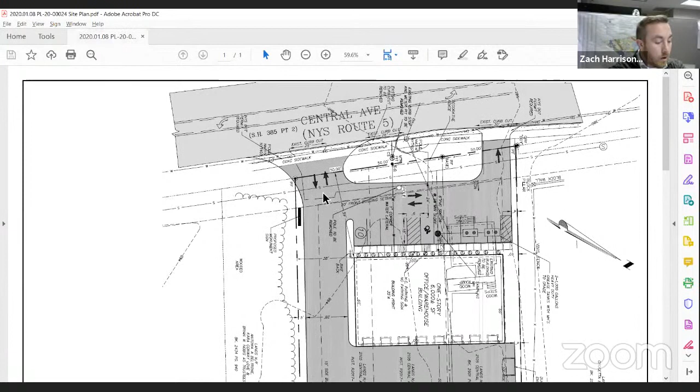Just to start it off, the project went to DCC back in December, and all town departments and the TD were present. Just real quick, because it's 3 properties, what will need to be done is a lot merger to create one parcel. So that will probably be done during the concept review if we get to that step. There's 2 waivers that are going to be required currently. The building exceeds the maximum setback off Central Avenue, which is 25 feet, so there's a waiver for that. And parking within the front yard is also requiring a waiver. The project's located in the floodplain, so it will be one thing that our department and the TD will have to determine if it needs to go to the Floodplain Management Appeals Board.

And just during the DCC meeting, a couple things that came up were the special use permits that were going to be required for the self-storage units and the warehouse, and that's going to go through the zoning board. And the drawing now shows the dumpster enclosure, which it didn't at DCC, and the dumpster enclosure is too close to the side yard, so that's going to be another variance unless it gets moved. So that's about it. I'll let Luigi go ahead and present if he needs to.

Okay, yeah, thank you. So good evening, Luigi Palesci with ABD Engineers. Also on the line with me is Matt Ward. He's with MRW Equipment Leasing. That's the name of the ownership of the property that he has this under contract. But he also owns a business called Trenchless Today. This 6,000 square foot building that he's proposing to build is for that business, Trenchless Today. They do underground pipe lining.

We are setting that up for 2 tenant buildings. He would take half and the other we're not sure of, but setting it up for a possible other tenant. So to back up a little bit, as Zach had mentioned, this property does consist of 3 properties, 2101, 2103, and 2105 Central Ave.

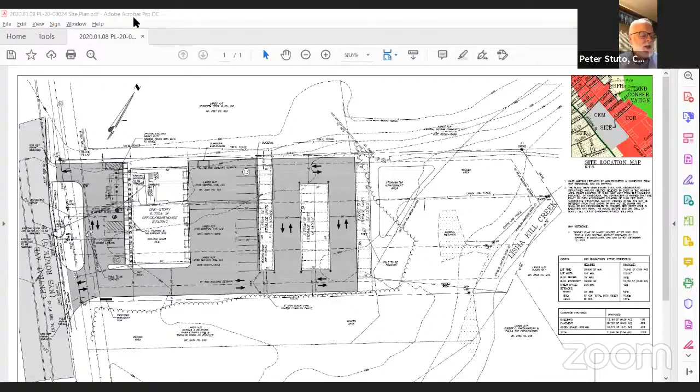Okay, next and final item on the agenda: 609 Boght Road, Kim Mixed Use, Concept Acceptance Review of a mixed-use development comprised of two separate structures, a single-story 3,400 square foot commercial structure, and a two-story 4-unit, 4,747 square foot residential structure. The site is zoned NCOR, neighborhood commercial office residential. We'll turn it over to Sean and the department if they have any preliminary comments.

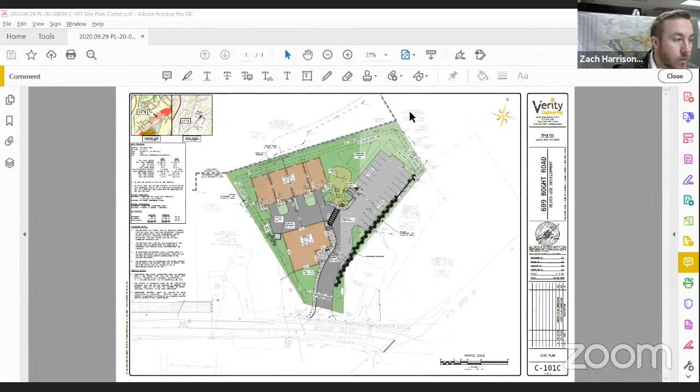Zach, you want to introduce this one? Yep, I can do that. So the last time you guys saw this project was back in August for sketch plan review. From what you saw back in August to today, there's not much that has changed in the actual design. The one big waiver is still the maximum setback from Boght Road—they exceed the 20 feet, so that's the waiver that will be required.

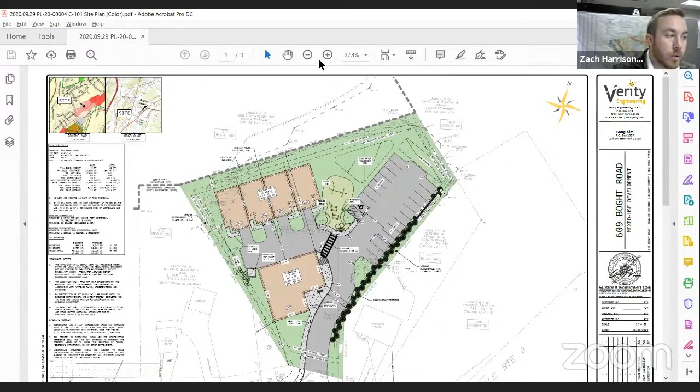Some of the comments from the planning board the applicant took into consideration: they've added the swing set and picnic area for the apartments in the back, and moved the handicap parking toward that area and included a crosswalk, so you have the capability of using the sidewalk connection from the handicap spot down to the commercial building. I think the biggest concern the planning board had last time was just the overall size of the project with two buildings on the site and the overall layout.

So other than that, I'll let Brian go ahead and start his presentation on any other changes he has. Thank you, Zach. Good evening, Chair, members of the board. Again, Brian Sipperly from Verity Engineering. We are here tonight representing Sang Kim for the mixed-use development at 609 Boght Road.

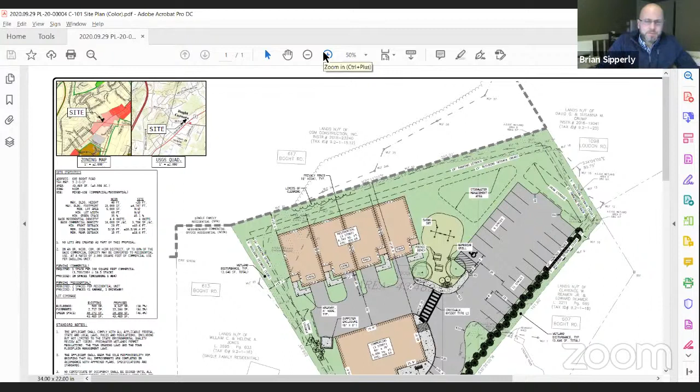Before I give a quick overview of the project, just because it's been a little time, Zach did point out a couple of key things I want the board to note. In general, the applicant wanted to pursue and advance the sketch plan the board saw last time. To familiarize the board with some of your comments: Zach mentioned the overall size, it appeared crowding was one of the comments, and we had comments about amenities, access to Boght Road, and kids' safety.

We talked about handicap access, dumpster location, and things like that as well. So what I want you to know is that the applicant definitely wants to advance what is shown in front of you all this evening. So what we did is go back to the drawing board and try to make those slight tweaks.

Based upon some comments from the board during our sketch review, and Zach you noted a couple of them: we've got an amenity area with a picnic bench, we've got a barbecue grill, and we've relocated the dumpster enclosure just off the edge of the commercial building, which is proposed to be a masonry enclosed structure.

We've relocated the handicap parking and added the crosswalk. Somebody mentioned last time that they didn't see pedestrian amenities out to Boght Road, but I just wanted to note those were there the whole time. We've always had a sidewalk. Thank you, Zach, for zooming out to show the Boght Road area with the sidewalk in the right of way.

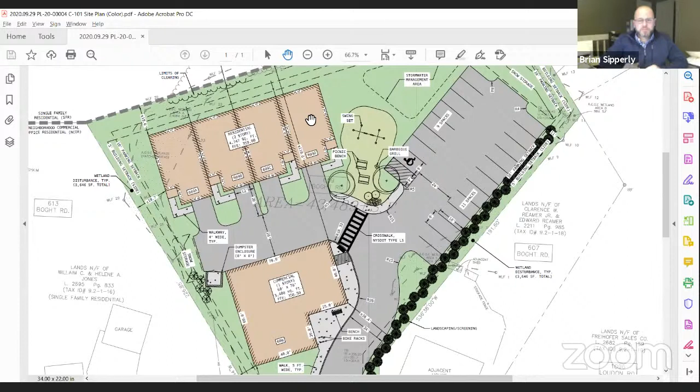I'll turn it over to the board for any questions at this point. Okay, as with the other project, this is being reviewed by our town designated engineer, Barton and Loguidice. Chuck, could you give us your comments on this project?

Sure, Peter. The board should have in their packets our concept review letter from November 24th of last year. In it, we did our typical concept review for the project, going through and looking at the site layout, the utilities, and the general engineering of the site. Right now, it appears, as Brian mentioned, we just had a couple questions and concerns.

Just for reference, this is an unlisted action as per SEQR, so the applicant will need to submit a short form. They actually submitted a long form, which is helpful, so we'll certainly utilize that. The board will have to make a SEQR determination down the road before any final conclusions. However, a couple additional comments: they're within the Boght area GEIS, so potential mitigation costs associated with sewer, water, and traffic may apply to this, and Sean can touch on that if he wants, but that's something that will potentially need to be looked at with any kind of commercial or mixed use development here.

We're also looking at a site that has an existing single family home. There were no other structures that we could tell. On the rear of the site, it looked like vacant land, so the redevelopment of the 4 residential units in the back would pretty much occur on vacant land.

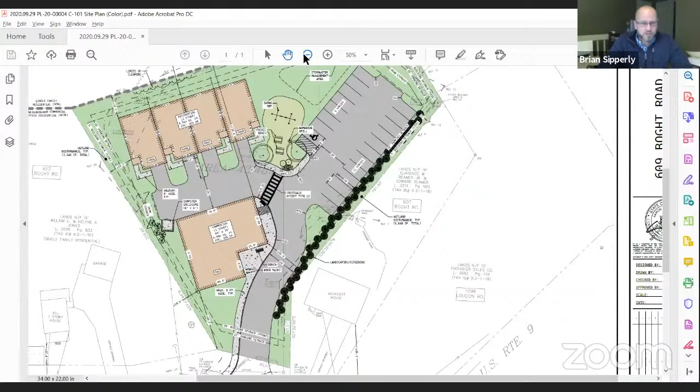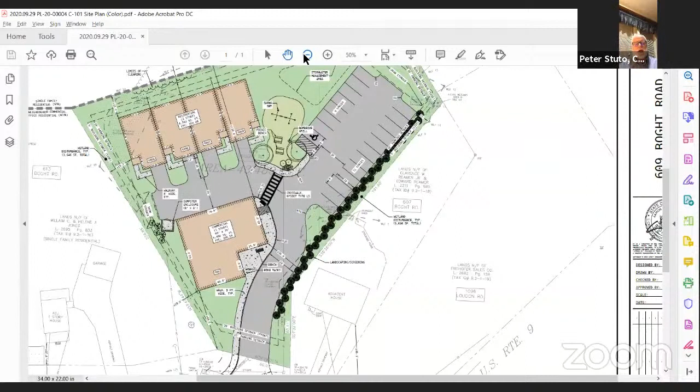Sure, I'll make a motion. Okay, that's Chip. Do we have a second? I'll second - that's Lou. Any discussion? All those in favor of the motion to table, say aye. Aye. All those opposed, say no. It sounds like it was unanimous to approve the motion to table the project. Okay, thank you.